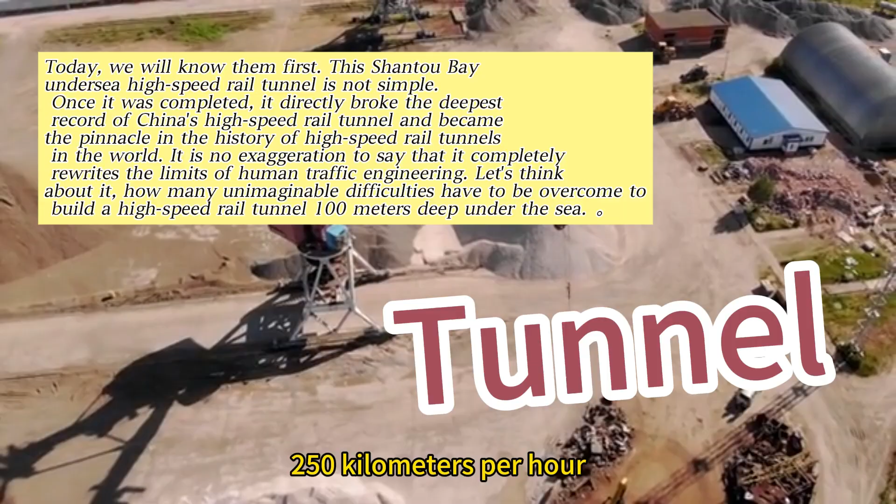Can you imagine that there is such a high-speed rail, speeding by at a speed of 250 kilometers per hour at a depth of 100 meters under the sea? This is not a fictional scene in a science fiction movie, but a great pioneering work that our China is turning into reality step by step.

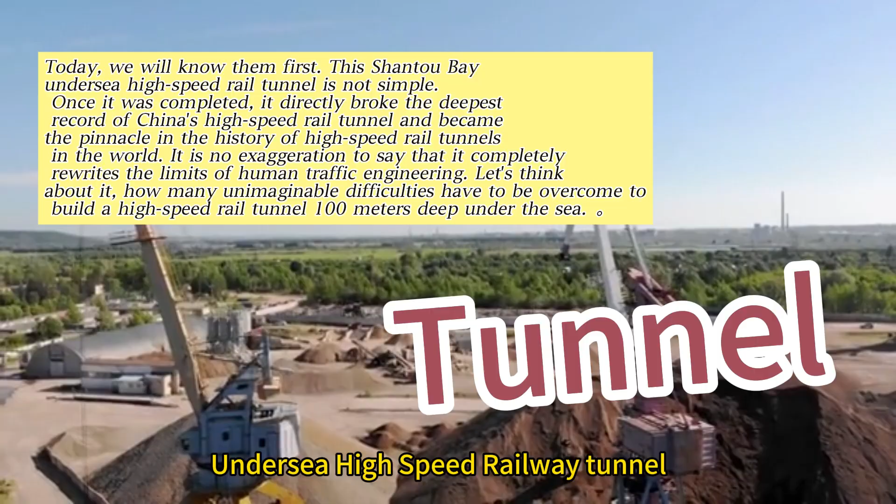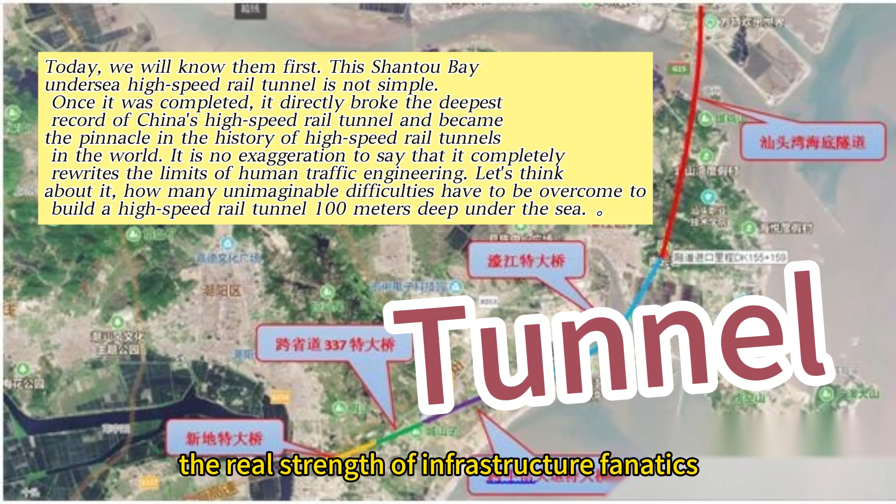This project is the Shantou Bay Undersea High-Speed Railway Tunnel, a super large project with a cost of up to 300 billion. As soon as the news came to light, it directly shocked the world, and even European and American experts who have always regarded themselves highly called it impossible. But we Chinese have always spoken with strength, and once again let the world witness the real strength of infrastructure fanatics. Today, I will take you to dig deep into the thrilling and shocking stories behind this super project.

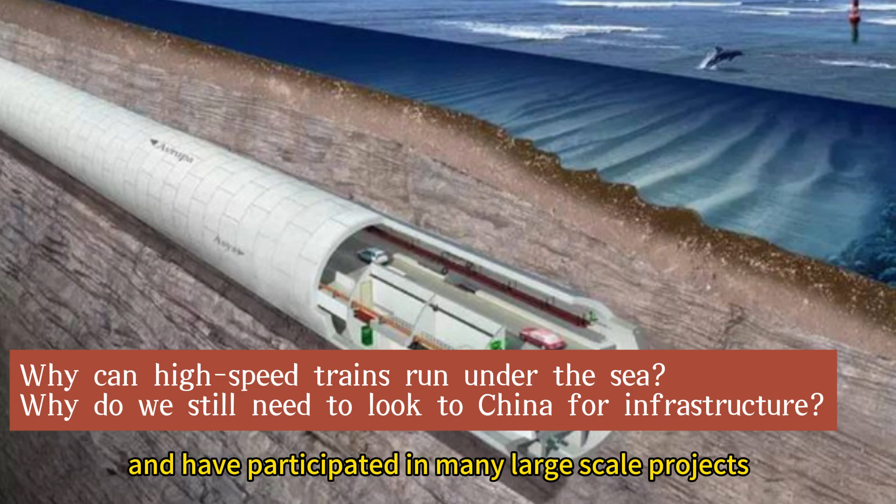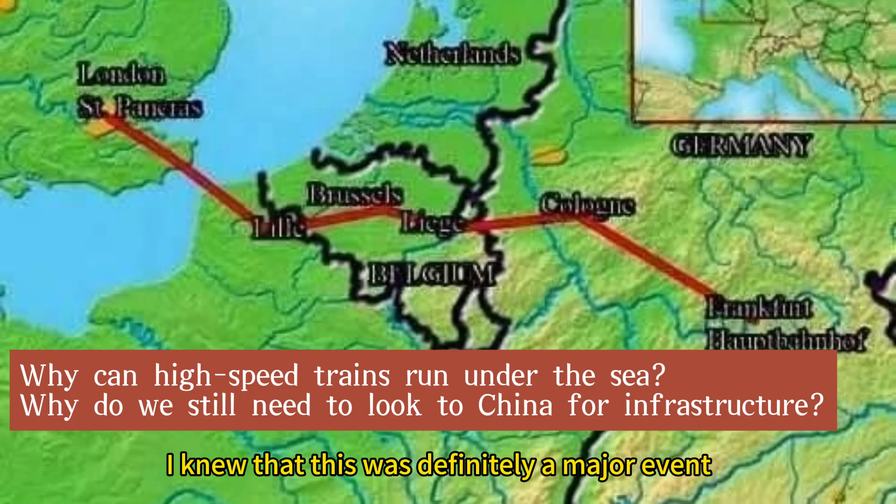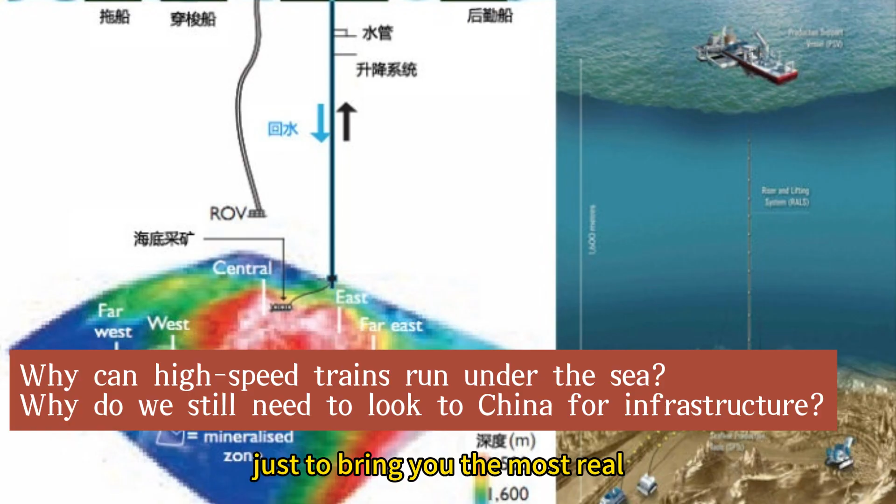First of all, I will make a bottom line with you. I have been in the field of infrastructure for many years and have participated in many large-scale projects. I have a good understanding of the infrastructure situation at home and abroad. As soon as the Shantou Bay Undersea High-Speed Railway Tunnel came out, I knew that this was definitely a major event that rewrote the history of world infrastructure. I have made great efforts to find a lot of internal information and consult various experts, just to bring you the most real, detailed and shocking first-hand information. Many of these contents have not been reported on a large scale in public channels. Today, we will know them first.

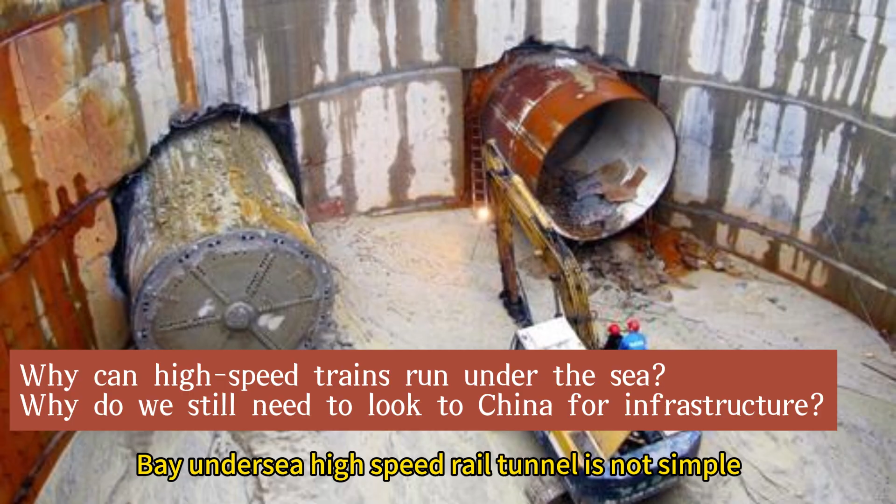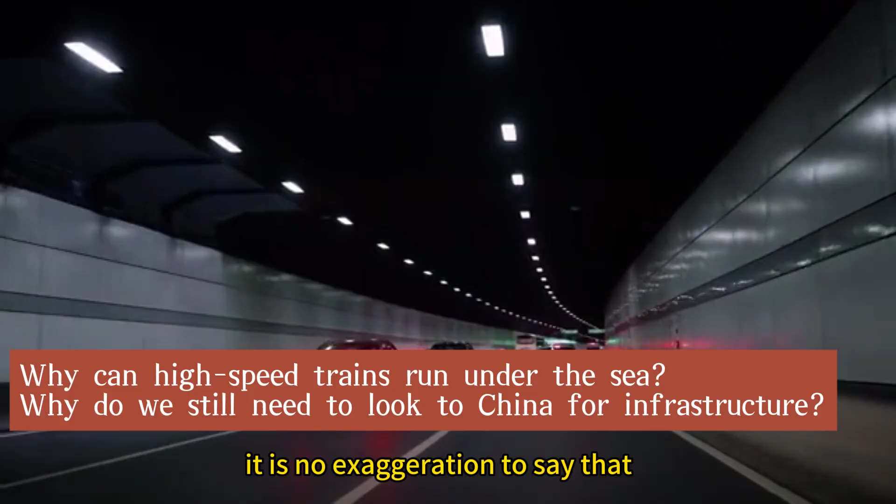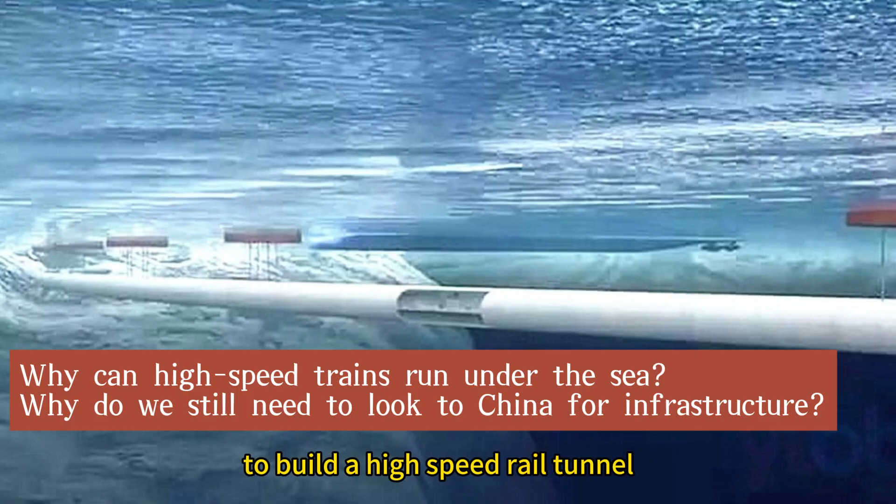This Shantou Bay Undersea High-Speed Rail Tunnel is not simple. Once it was completed, it directly broke the deepest record of China's high-speed rail tunnel and became the pinnacle in the history of high-speed rail tunnels in the world. It is no exaggeration to say that it completely rewrites the limits of human traffic engineering. Let's think about it. How many unimaginable difficulties have to be overcome to build a high-speed rail tunnel 100 meters deep under the sea? Next, I will show you how rebellious the design of this project is, and how we Chinese rely on wisdom and courage to gnaw this hard bone.

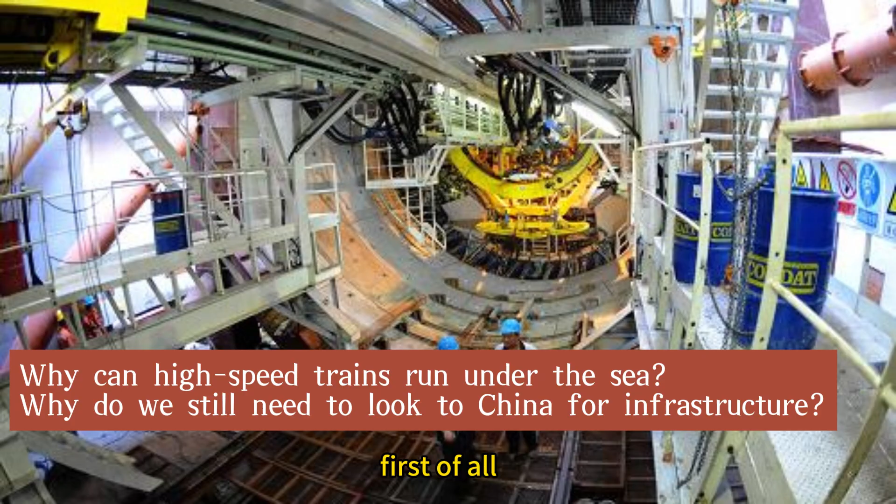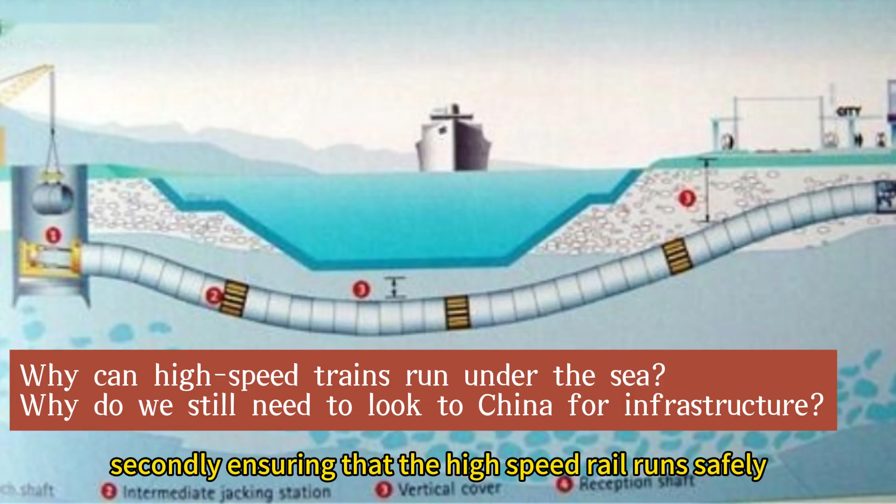Before I start, let me give you a few key facts. First of all, this tunnel construction has to face high-pressure undersea and complex geology and other natural challenges. Any one of these problems would be enough to make many countries' engineering teams turn away in fear. Secondly, ensuring that the high-speed rail runs safely and stably in such extreme conditions is an unimaginable technical challenge. Finally, our Chinese engineers have successfully overcome these problems by using a series of new technologies and methods.

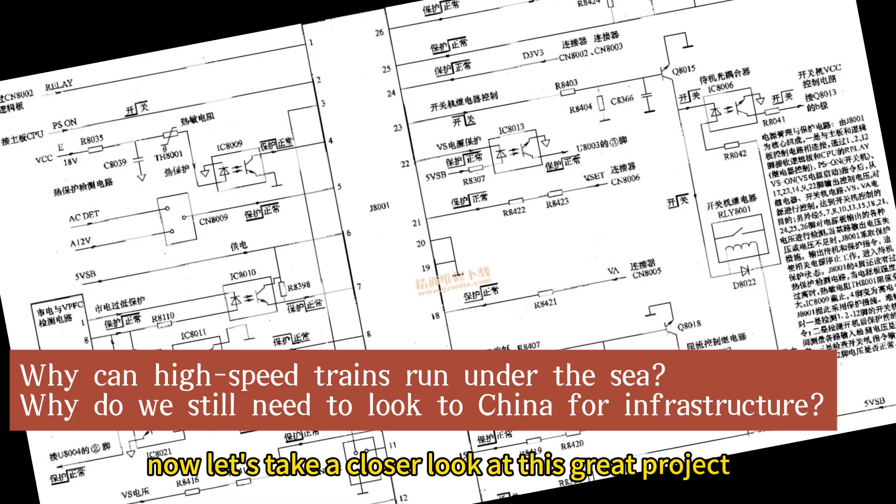Now, let's take a closer look at this great project together. Part one: Undersea High-Speed Rail Dream, Global Challenges and China's Solutions.

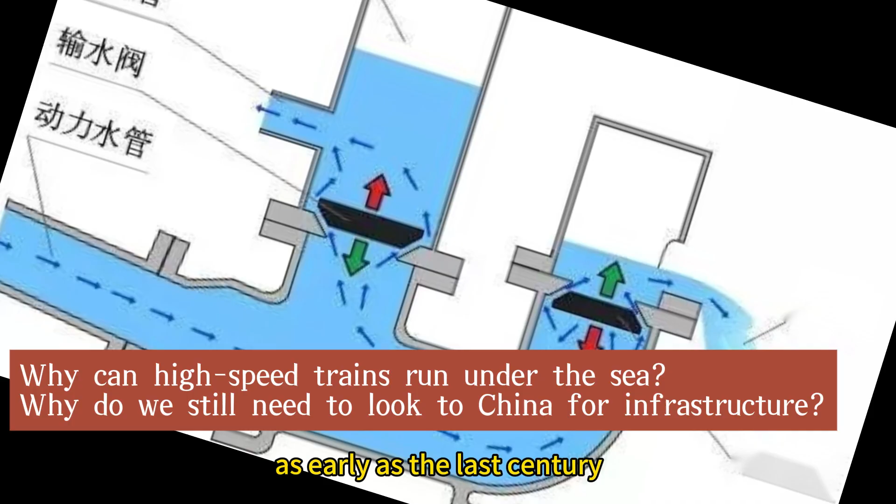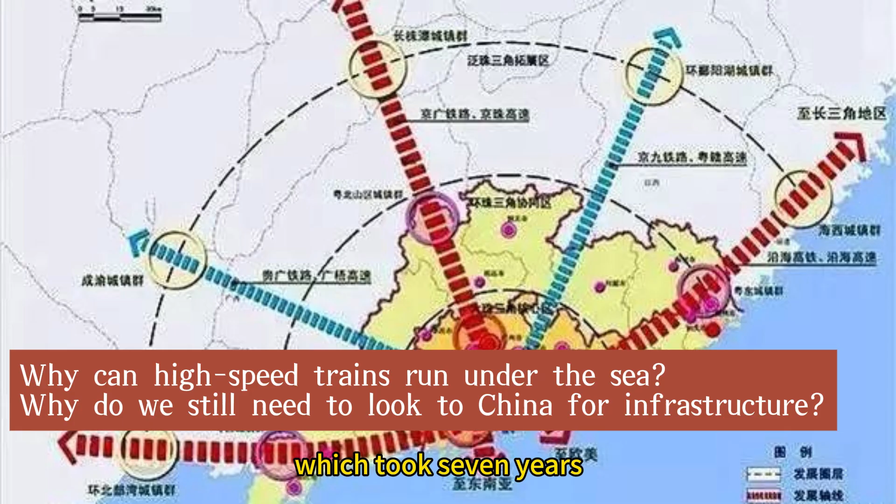In the field of traffic engineering, the construction of undersea tunnel has always been a challenging problem. As early as the last century, some developed countries in Europe and America have begun to try to build undersea tunnels. For example, the Channel Tunnel, which connects Britain and France, was started in 1987 and officially opened to traffic in 1994, which took 7 years. The total length of this tunnel is 50.5 kilometers, of which the seabed part is 37.9 kilometers. The total investment is as high as 10 billion British pounds.

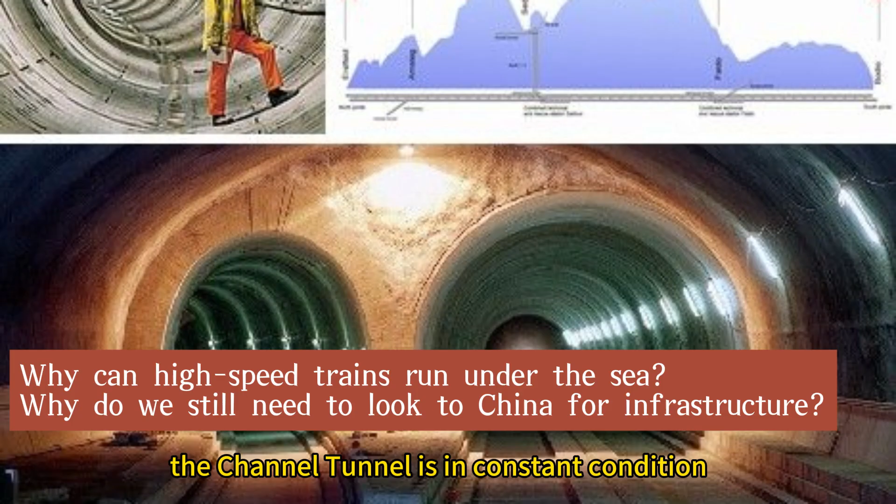When converted into the current currency value, it is an astronomical figure. At that time, in order to build this tunnel, Britain and France assembled top engineering teams and invested a lot of manpower, material and financial resources. But even so, the Channel Tunnel faced constant difficulties during the construction process. Due to the complex geological conditions of the seabed, many accidents such as water gushing and collapse were encountered during the construction process, and the progress of the project was seriously hindered. Moreover, due to technical limitations, the design speed of this tunnel is only 160 kilometers per hour, which is far from meeting the operating requirements of modern high-speed rail.

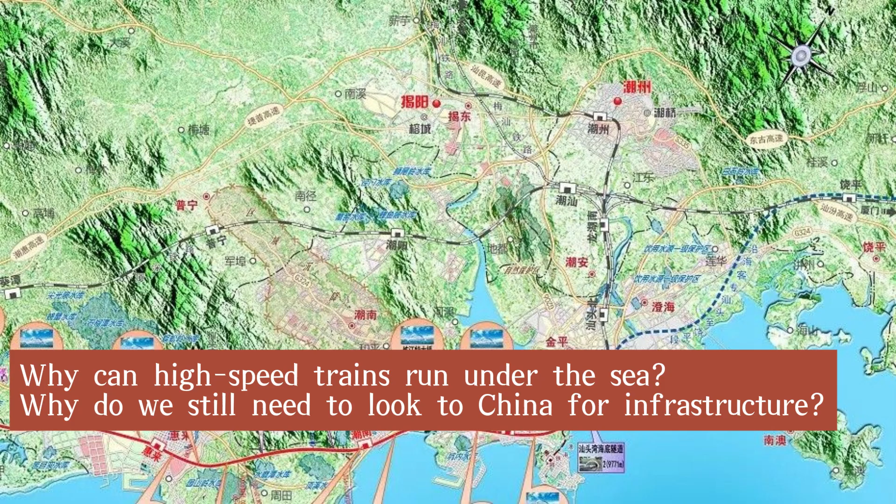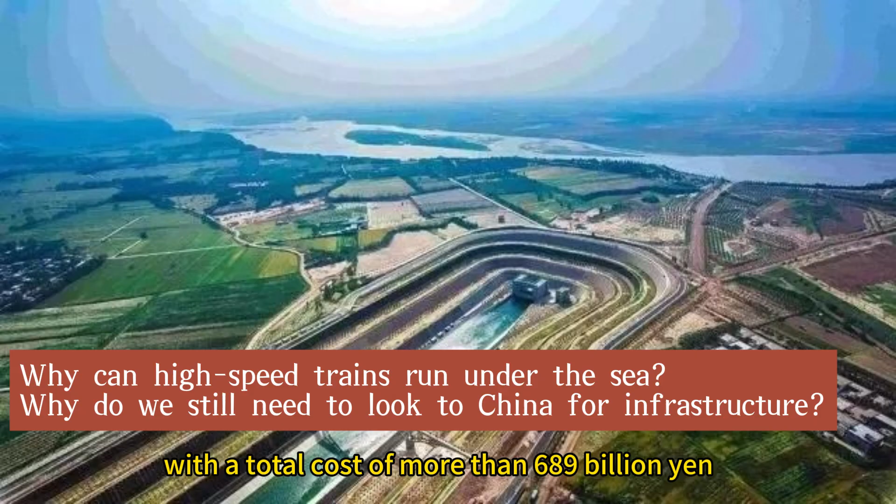Take a look at Japan's Seikan Tunnel, which is also one of the world's famous undersea tunnels. Construction started in 1964 and was not completed until 1988, which took 24 years. It has a total length of 53.85 kilometers and a seabed part of 23.3 kilometers, with a total cost of more than 689 billion yen. Although the Seikan Tunnel has solved the traffic problem between Honshu Island and Hokkaido in Japan to a certain extent, it also faces many technical problems. During the construction process, it took a lot of time and energy to deal with the volcanic geology of the seabed.

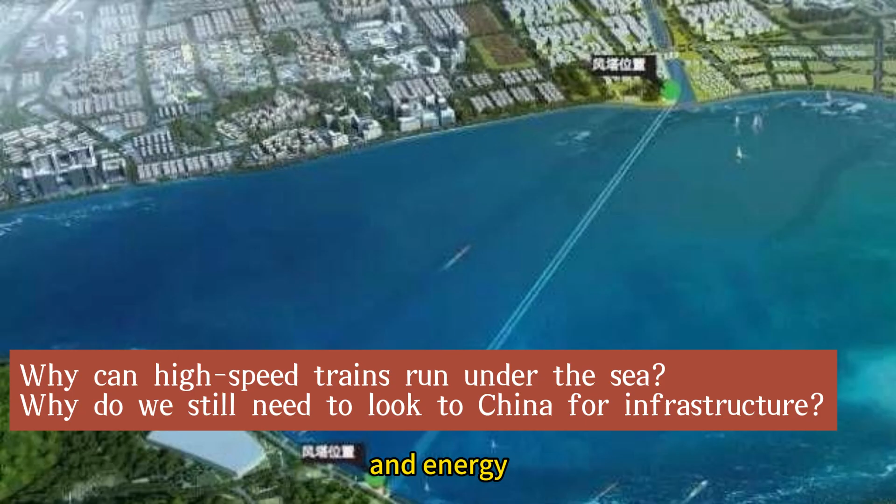In contrast, our Shantou Bay subsea high-speed railway tunnel must not only overcome natural challenges such as submarine high pressure and complex geology, but also ensure that the high-speed rail can operate safely and stably at a speed of 350 km per hour. This difficulty is much higher than the submarine tunnels previously built in Europe, America, and Japan. But we Chinese engineers are not afraid.

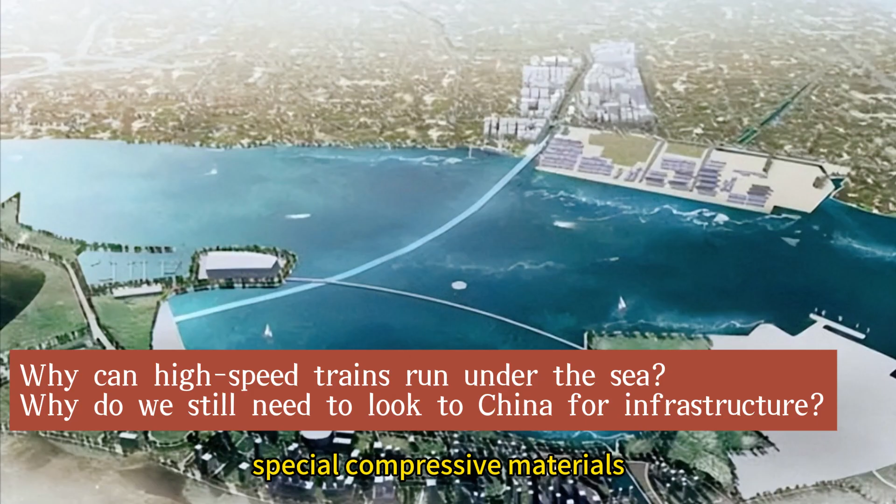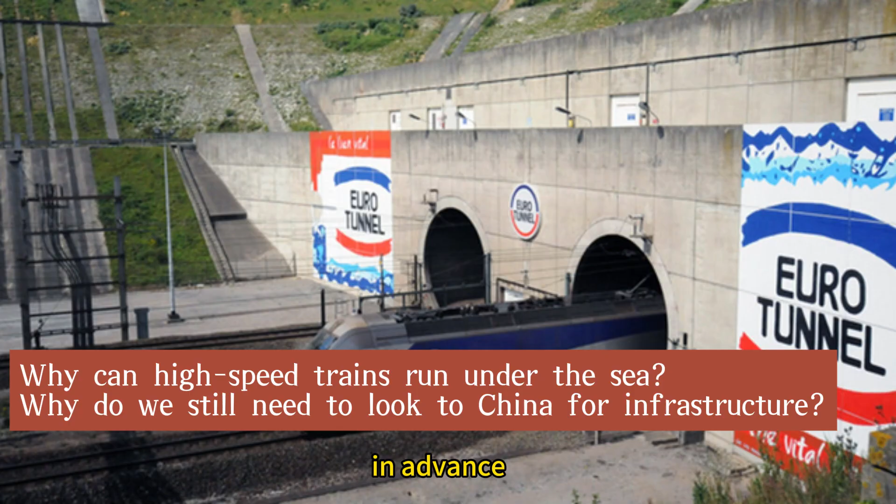After years of technological research and development and practical experience, we have put forward a series of innovative solutions. For example, in view of the problem of high pressure on the seabed, special compressive materials and structural design have been developed to ensure the tunnel is stable in a high water pressure environment. For complex geology, advanced geological exploration technology and construction technology have been adopted to accurately detect geological conditions in advance, and then formulate targeted construction plans.

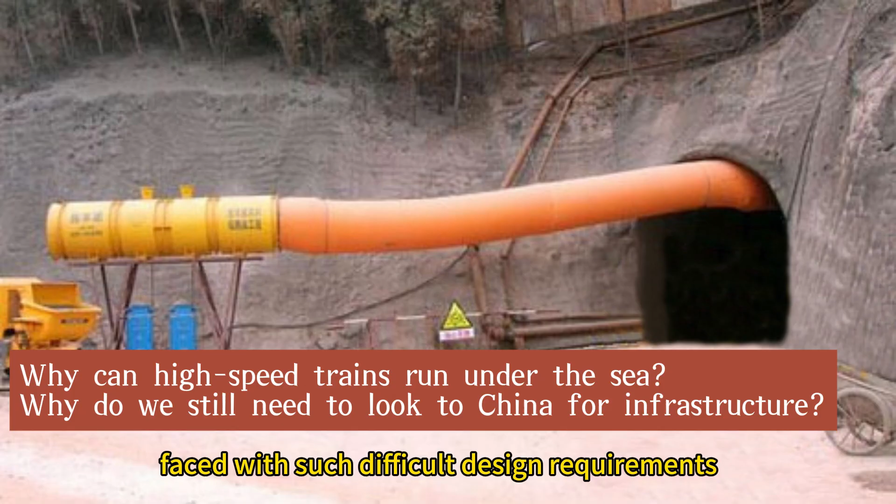The proposal of this series of Chinese plans has laid a solid foundation for the construction of the Shantou Bay subsea high-speed railway tunnel. Countries in Europe and the United States have already had many difficulties in the construction of undersea tunnels before. Faced with such difficult design requirements, they feel it is impossible to achieve, and that is understandable. But China has always been a place to create miracles. The more difficult it is, the more it stimulates our fighting spirit.

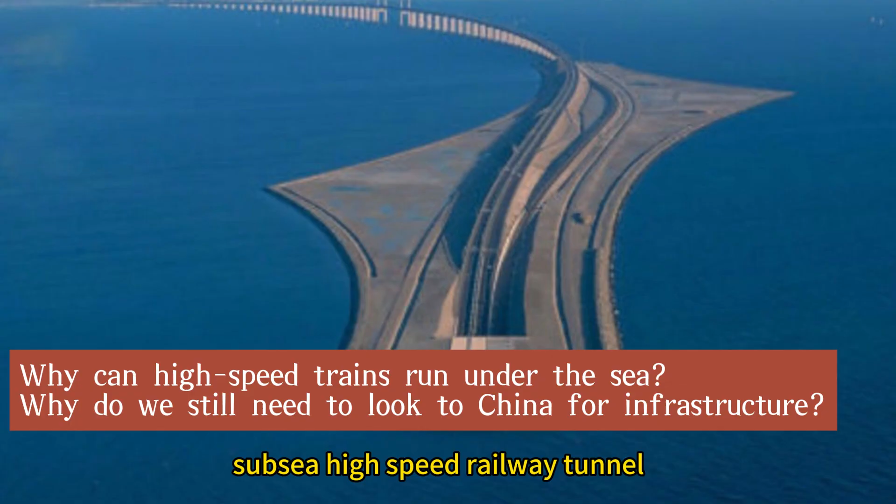Overcoming natural challenges: high pressure, geology, and earthquake resistance. Subsea high pressure is the primary problem facing the construction of the Shantou Bay subsea high-speed railway tunnel. At a depth of 100 meters under the sea, the water pressure is beyond imagination. Every square meter has to withstand nearly 100 tons of pressure, equivalent to an adult elephant standing on your fingernail.

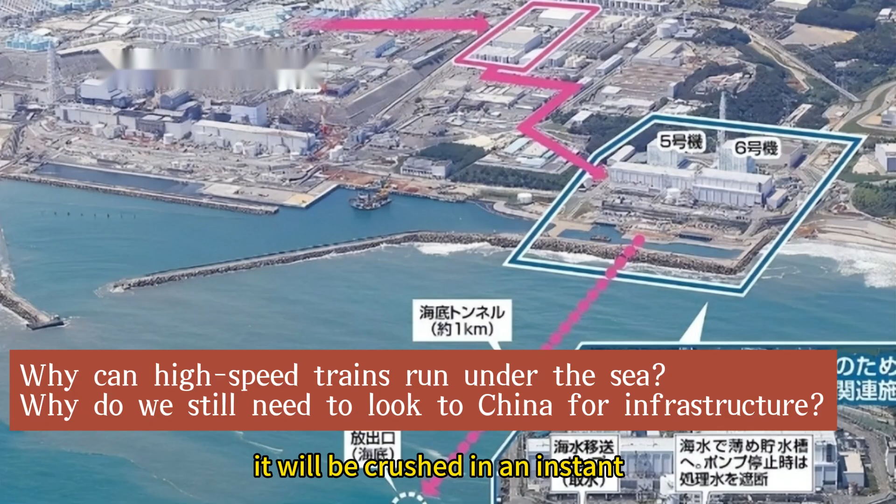With such a lot of pressure, if the tunnel structure is not strong enough, it will be crushed in an instant. To solve this problem, Chinese engineers have developed a new type of high-strength concrete material after countless tests and research. This material not only has high compressive strength but also good waterproof performance, effectively resisting the erosion of seawater. At the same time, in the structural design of the tunnel, a unique arch structure is used, which can evenly distribute the water pressure to all parts of the tunnel, greatly improving its compression resistance.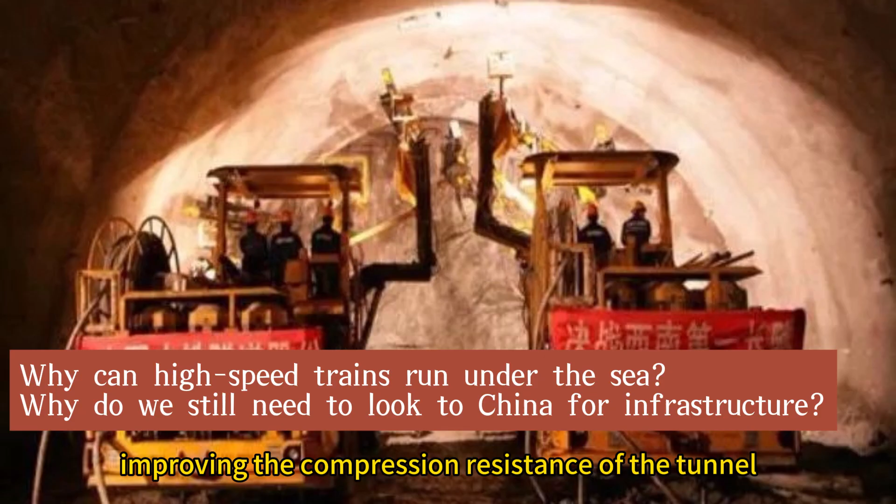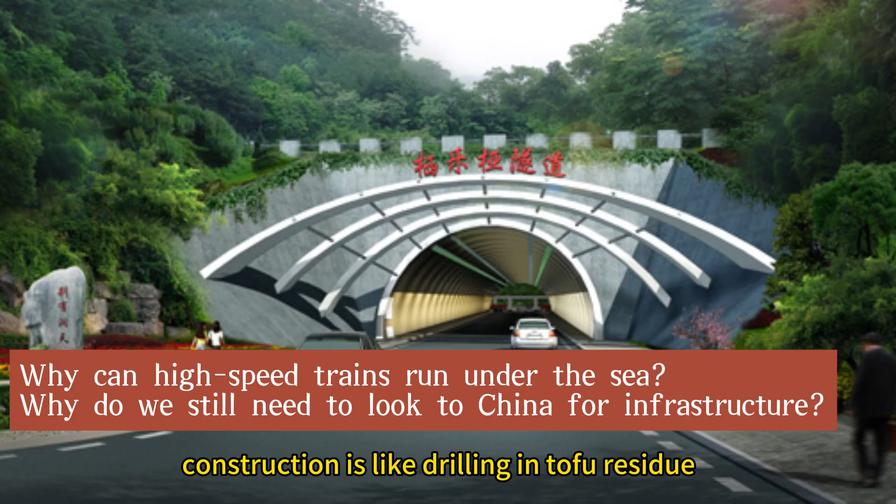Let's talk about complex geology. The geological conditions at the bottom of Shantou Bay are extremely complicated, with not only hard granite but also soft mud layers and fault zones. Under such geological conditions, construction is like drilling in tofu residue, where a slight mistake can lead to serious accidents such as collapse and water gushing.

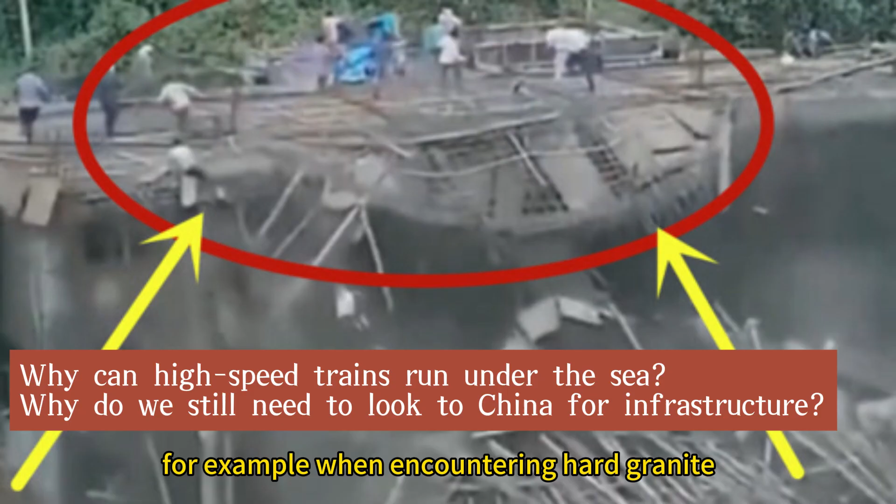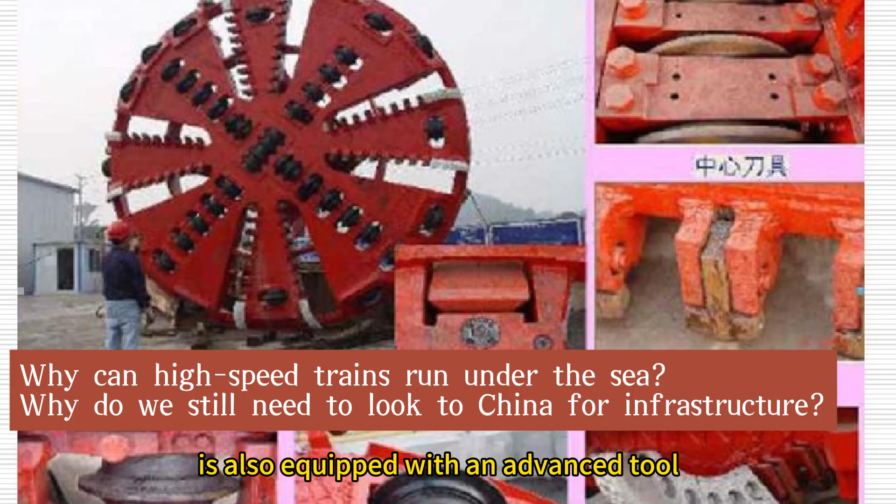To deal with this problem, engineers used a variety of advanced construction techniques. For example, when encountering hard granite, the world's leading shield machine is used for tunneling. This shield machine has a diameter of 14.57 meters, like a huge steel monster, which can easily crush hard rock. Moreover, the shield machine is equipped with an advanced tool monitoring system, which can monitor tool wear in real time and replace it in time, greatly improving construction efficiency.

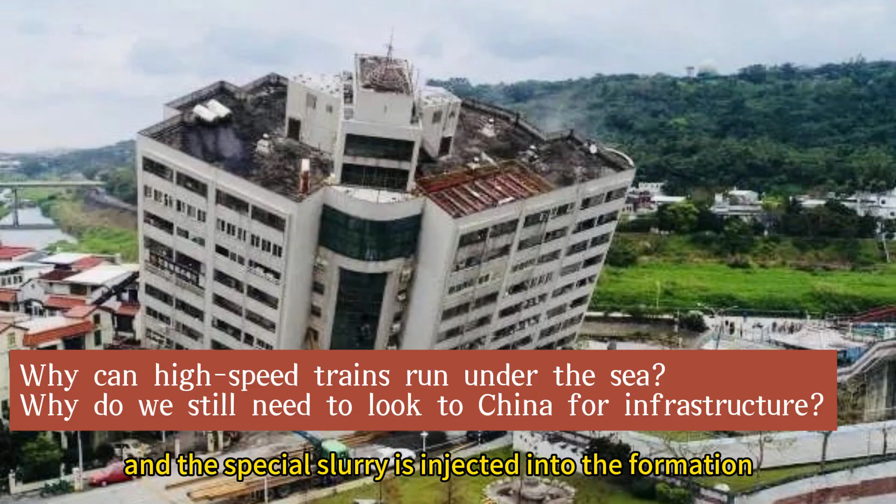When crossing the silt layer and fault fracture zone, advanced grouting reinforcement technology is adopted, injecting special slurry into the formation first so the soft formation becomes stronger, then construction is carried out, which effectively avoids collapse and water gushing accidents.

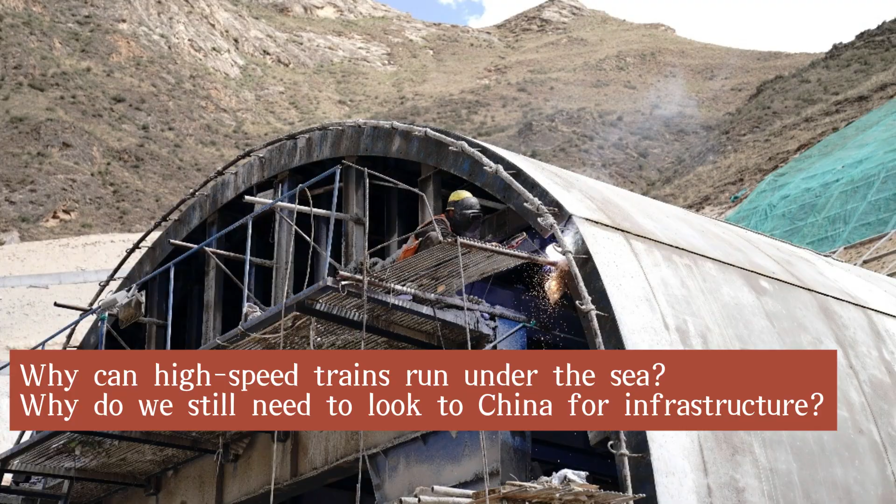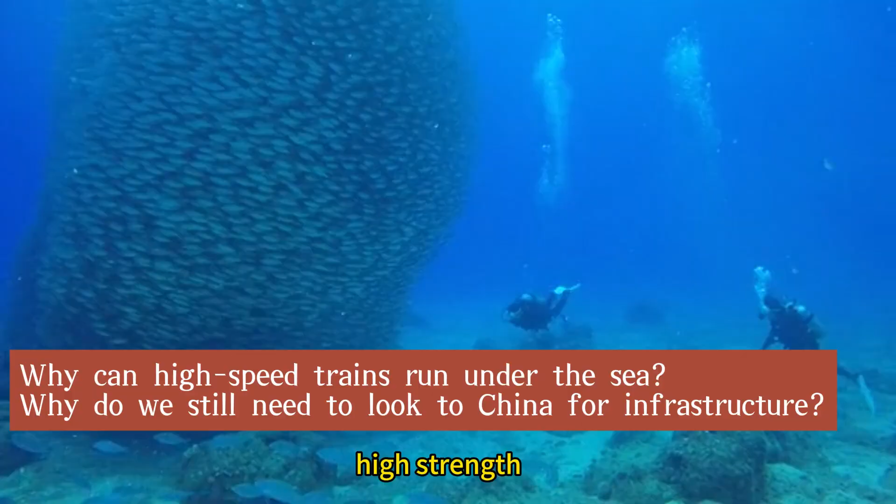In addition, the Shantou Bay area is still in a seismically active zone, and seismic design is a key link in tunnel construction. Through detailed analysis of seismic data, engineers adopted a special seismic structure design. High-strength steel bars are added to the lining of the tunnel to enhance its overall strength and toughness. At the same time, a number of seismic joints are set up to divide the tunnel into several relatively independent parts. When an earthquake occurs, these seismic joints can effectively absorb and disperse seismic energy, reducing damage to the tunnel structure.

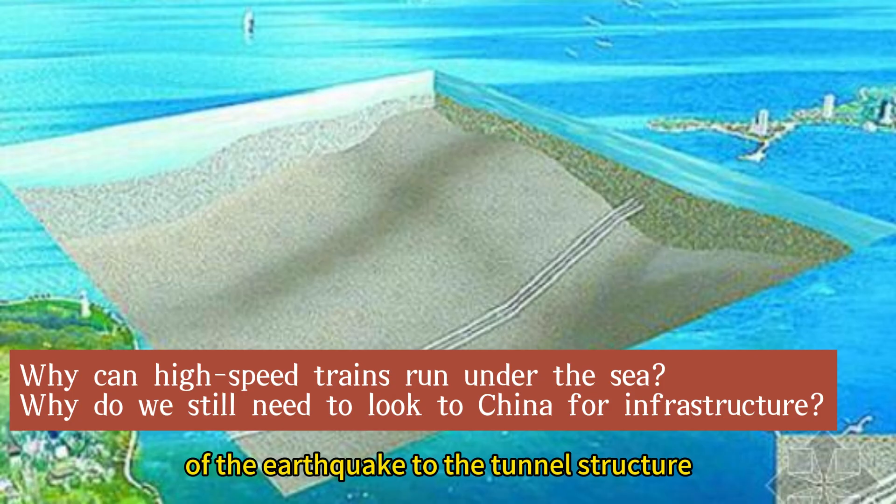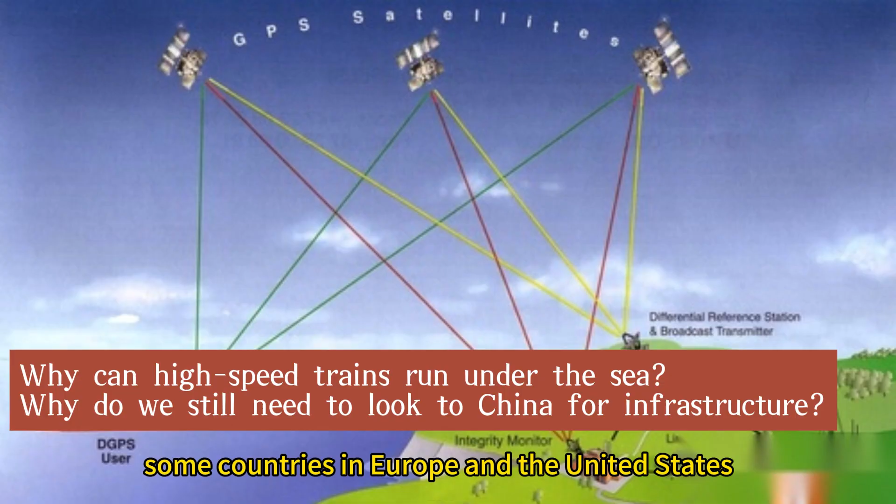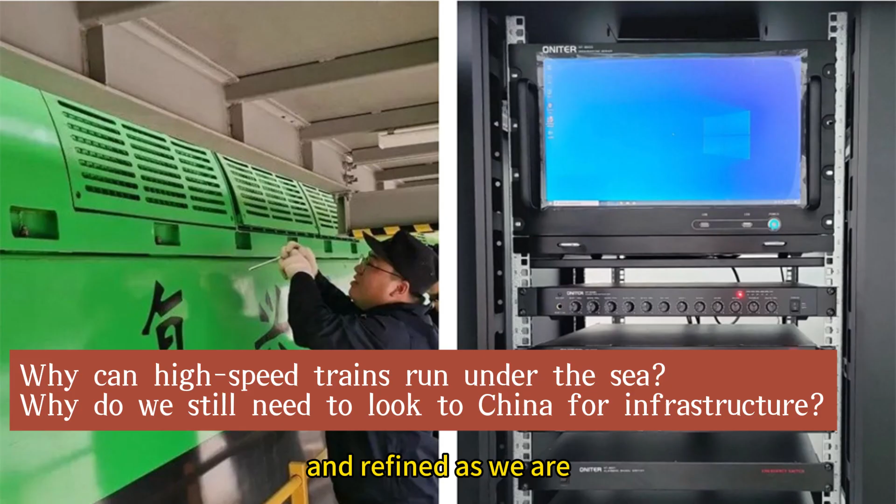This all-round and multi-level seismic design ensures the safety of the tunnel in the face of natural disasters such as earthquakes. In contrast, some countries in Europe and the United States also consider earthquake resistance in the construction of undersea tunnels, but due to technical and cost reasons, they are often unable to be as comprehensive and refined as we are. With this ultimate pursuit of details and continuous innovation of technology, our Chinese engineers have successfully overcome one natural problem after another.

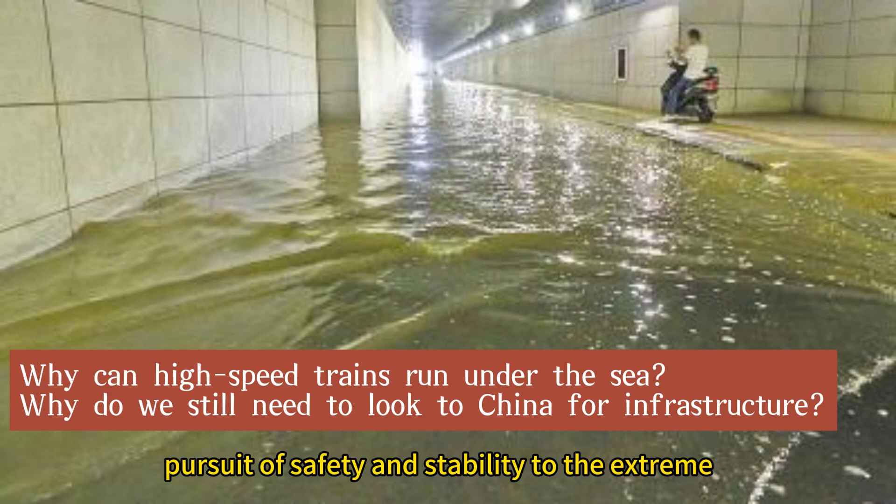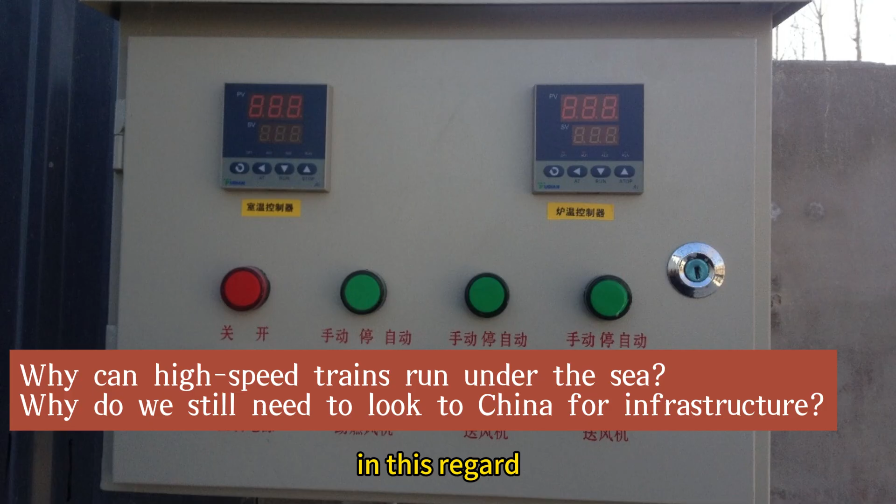Ensuring high-speed rail operation: pursuit of safety and stability to the extreme. Ensuring the safe and stable operation of high-speed rail in the undersea tunnel is the core goal of the whole project, and Chinese engineers have made great efforts in this regard. First, the power supply system. In the subsea environment, the traditional power supply method simply does not work.

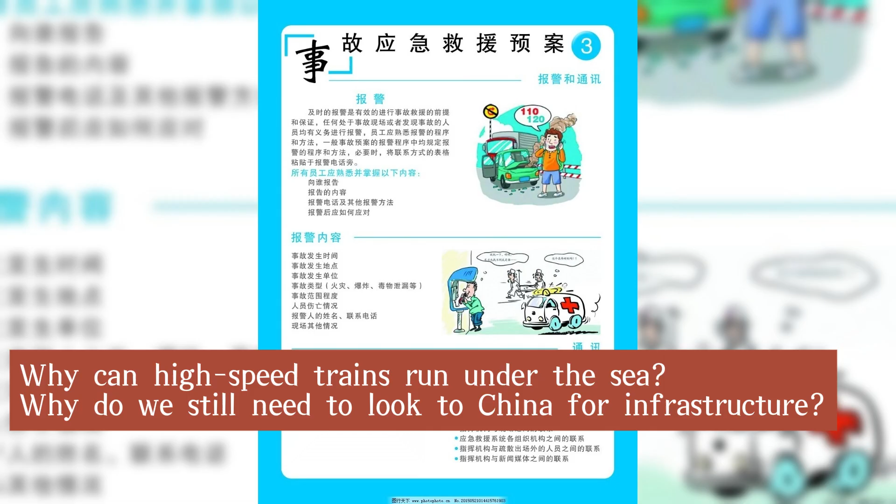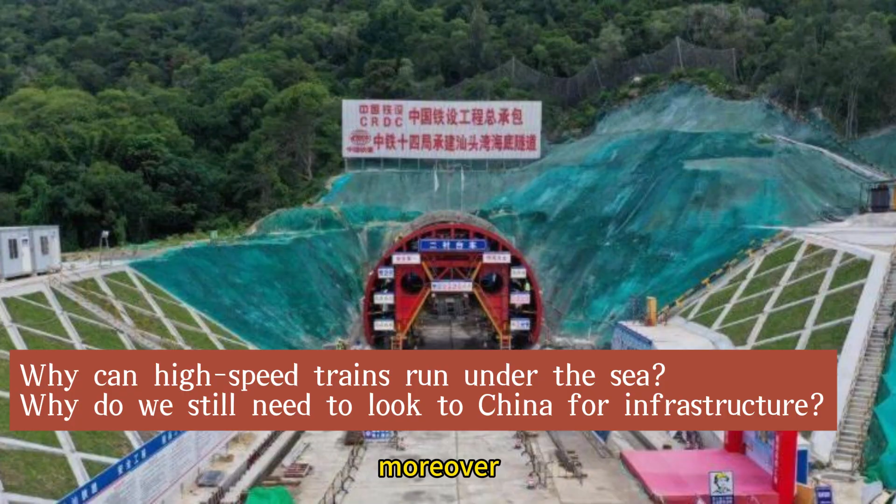To solve this problem, engineers have developed a new type of submarine cable power supply technology. This kind of cable adopts special insulation material, which can operate stably in high water pressure and strongly corrosive seawater environments. Moreover, to ensure the reliability of power supply, multiple sets of backup power supply systems are also set up. Once the main power supply fails, the backup power supply can automatically switch in an instant to ensure the normal operation of the high-speed rail.